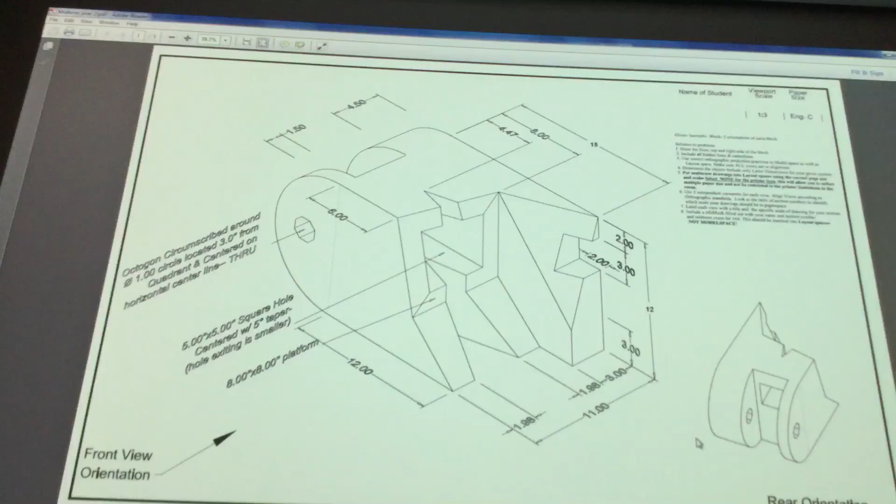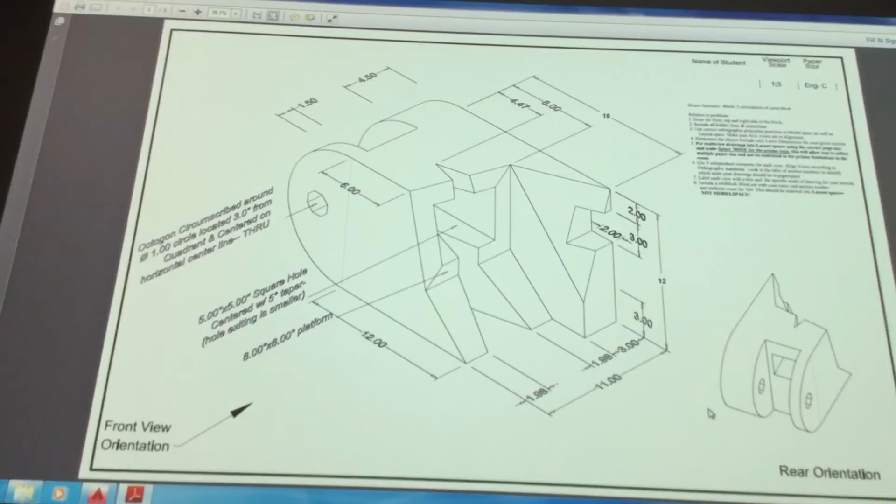This will be similar to what you end up getting in the process of making it now. So the only addition, you're going to have an auxiliary view to do. Okay? And this one doesn't have an auxiliary. If you want to test or try to do the auxiliary, this little incline here in the front, just cut through it. It's probably a good one to test your auxiliary skills.

Beyond that, it's just going to be a block where you create the front view, the top view, and the side view. Whether it be right side or left side depends on which direction you see the front view. Okay? For the most part.

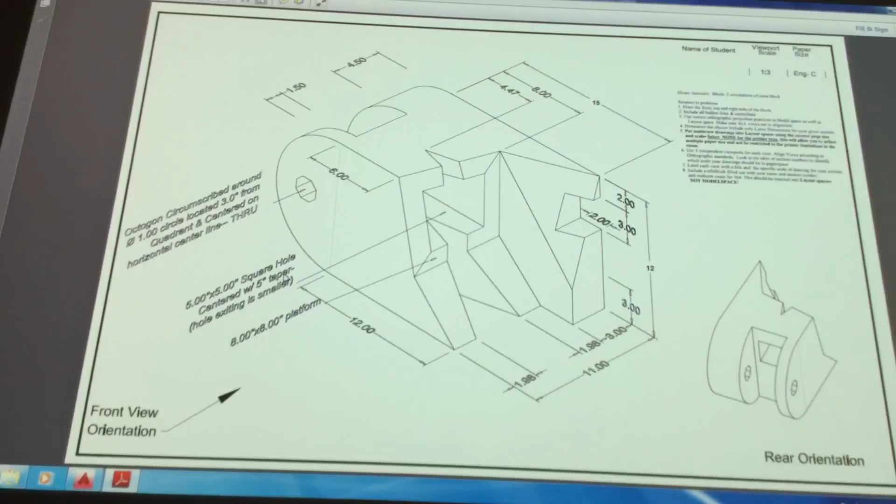This thing in the middle here, just make it a 5x5 square cut through the middle. Do not taper it. A taper is going down to a smaller hole. Okay? We don't want that. That will cause you all kinds of issues. Just make it a nice square hole through here and be done. Okay?

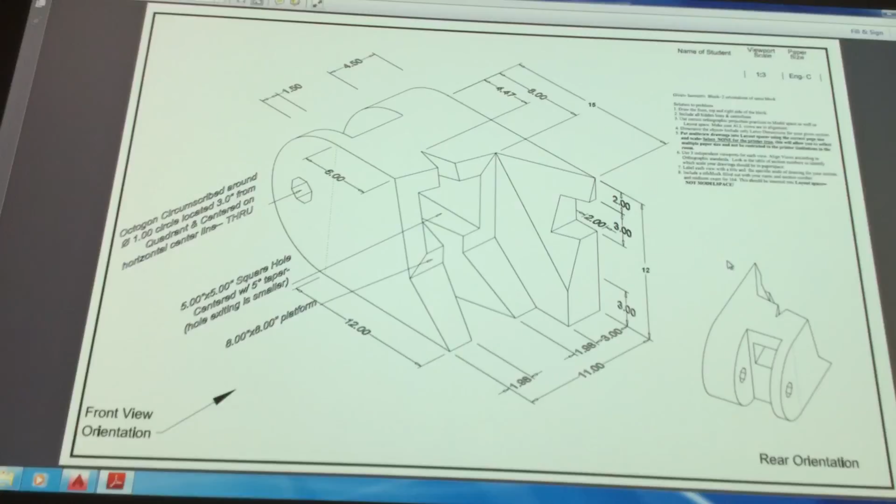To start off, you will end up getting some coordinates in your midterm that I expect you to follow. 0, 0 is going to be your starting point for the front view. Even if it's a rounded corner like this, you take a line straight down and a line across here, 0, 0 is going to be back here in the corner. Alright? If it was square. So start at 0, 0.

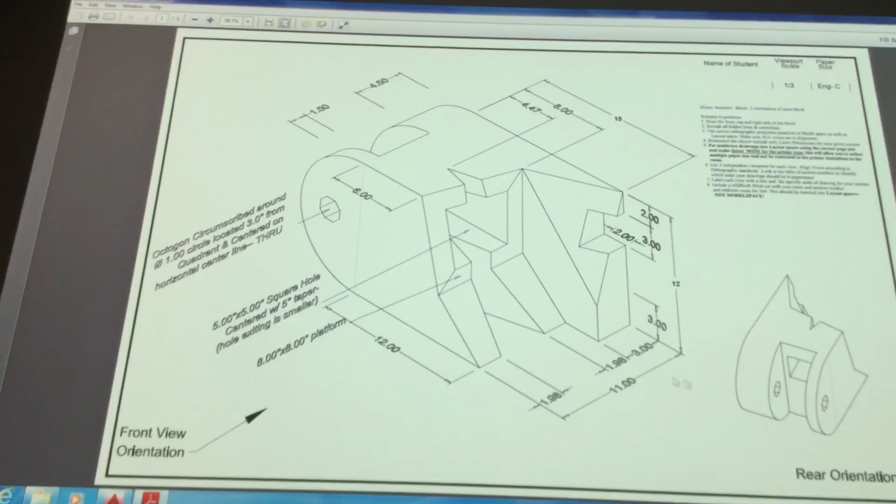I will give you coordinates for the lower left corner of the right side, and for the left front top corner. Put your front view, top view, and side view at those coordinates, and everything will be fine. Okay? I do this for a couple reasons. A, TAs get a DWG block they can superimpose over the top of it. Or, if need be, I don't think we'll have enough time to PDF it.

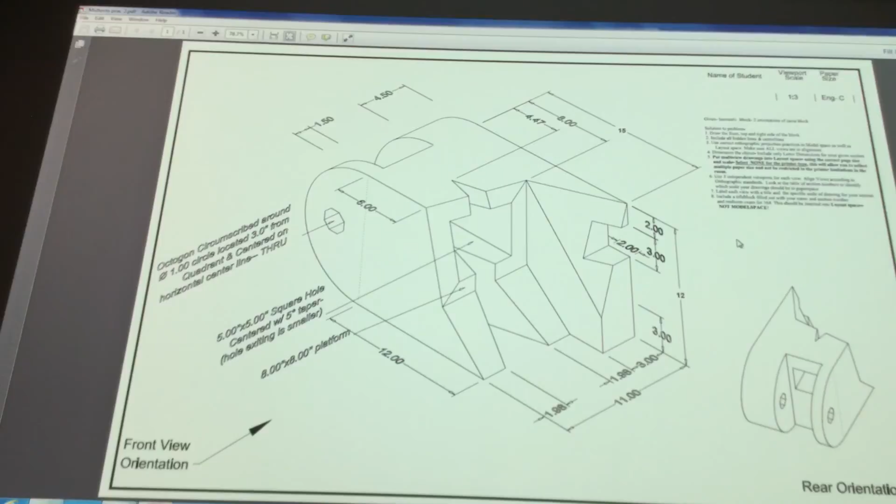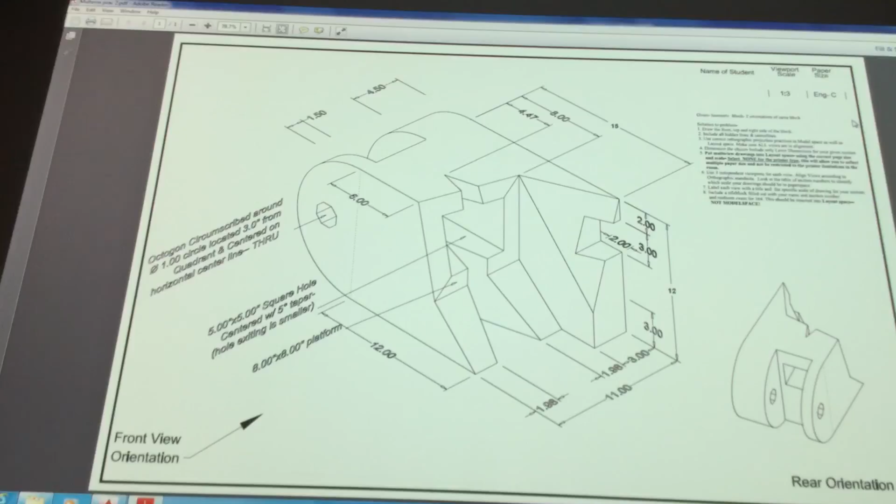It used to be in years past, I'd have you just send a PDF in. And Bluebeam, if you are practicing with it, will actually compare two PDFs, so you can see what's wrong and what's right. It was an experiment in trying to figure out if we could grade these things quicker, and it failed. It just ended up circling the whole thing, which doesn't mean anything. So now I give them a DWG block, and they can put it over the top of it and see where your lines are missing and where you have extra lines. Pretty straightforward.

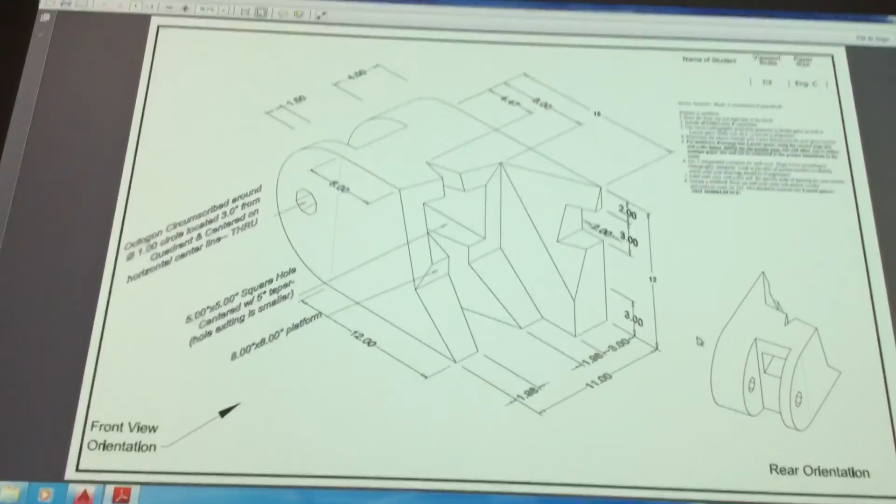So starting this thing, it's 21 inches long, 12 inches tall, and 11 inches deep. I would start there in all the views. I'm not going to get through most of this. The things I do want to hit are the engineering C and layout space. Make sure you have a good understanding of layout space, because most companies utilize it. AutoCAD is declining in use, but you should still have the ability to get into a file and manipulate it a little bit. One of the things is printing. That's done in layout space. So we're going to get through that.

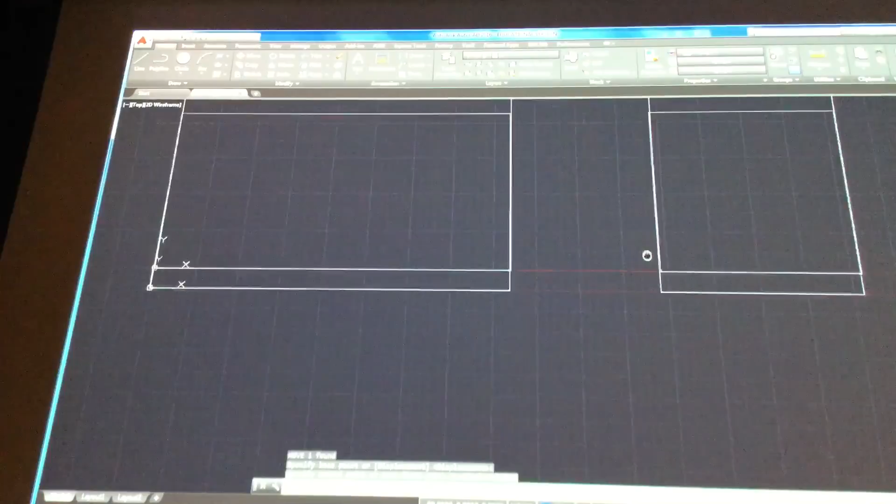So 21, 12, and 11. We'll do a box here. 21, 12. There's the front view. Here at 11, 12, there's the side view, and I'm just going to move it off to the side here real quick. And top view. I would suggest doing something similar, so you at least get going on this thing.

The largest problem I see when you first get this initial midterm is, well, how do I start? Well, there, you started. I used to not say a word during the midterm, and then I got to the point where, I was a horrible test taker when I was here, still am. I suck at it, okay? But it's that starting thing, getting yourself going.

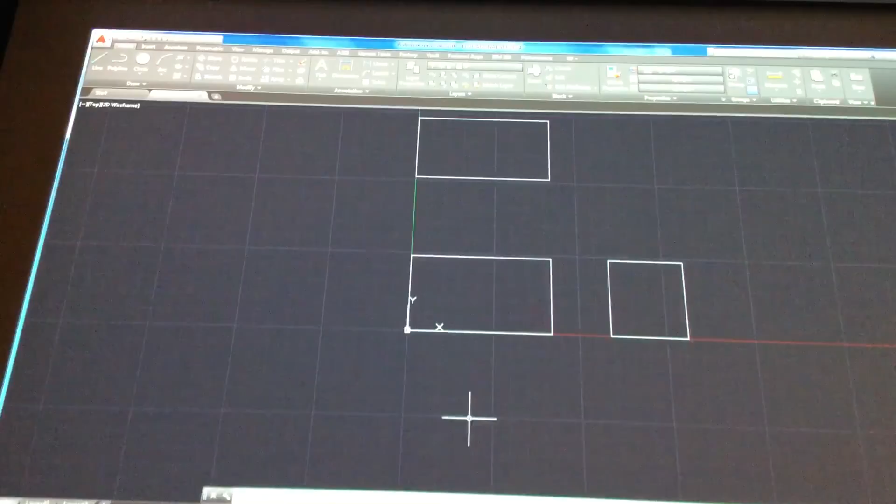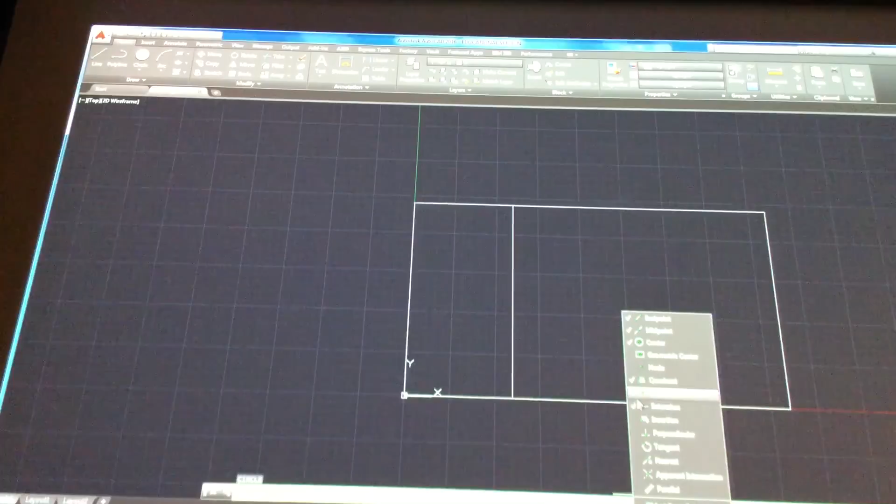This is just some block where you're trying to figure out how to see the front view, the top view and the side view, improving your visualization. It's just a start here. I know this whole end is round, right? I could explode all of these real quick and offset this thing 6 inches, and then draw a circle here. Let's see, midpoint, quadrant, and perpendicular snaps are good. So I can draw my circle in there and then trim some of this stuff out right off the bat. And at least we're started.

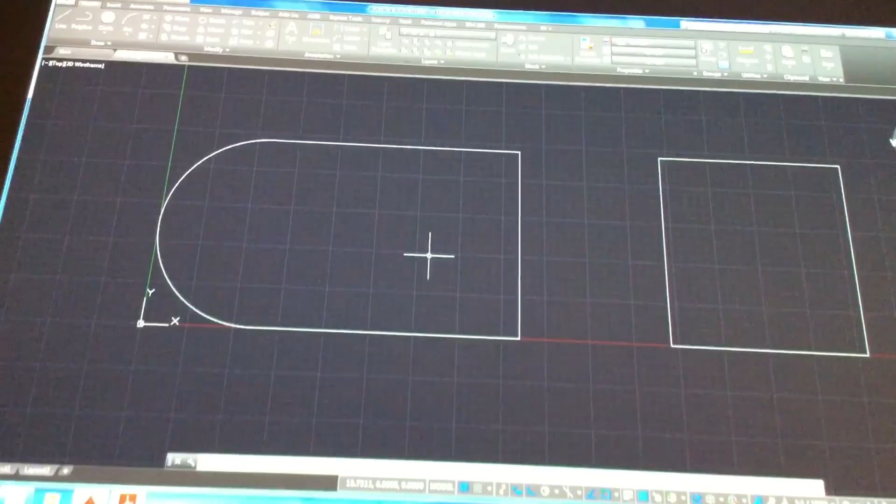Making it look like the object, okay? That's the big key, is getting things that you know will be correct. Even though I didn't look at it over here, I remember that it's circular on this end. And then we start working with things.

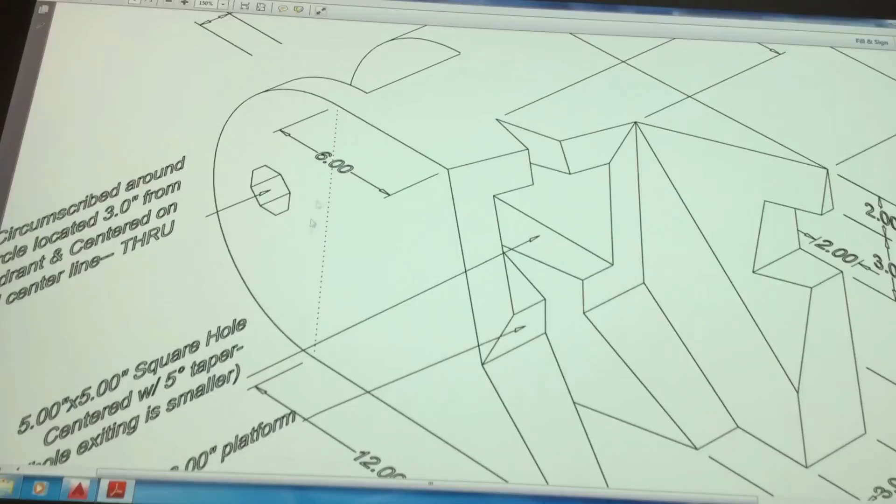We got 12 inches. Now, anytime you're looking at this, you'll notice there's some dotted lines here. The dotted lines represent either an edge or center of something. And if it's normally the center, I will put a center line in here. This one I forgot, basically, but this represents the center of that circle, at least that point.

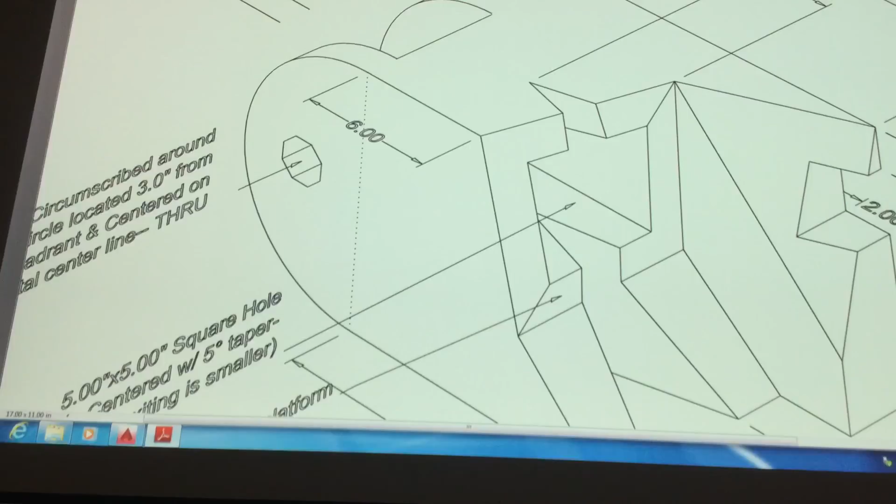You'll notice that this edge here goes to the center of that. The hole cut through there is at that point as well, all right? So we get some dimensions from this accordingly.

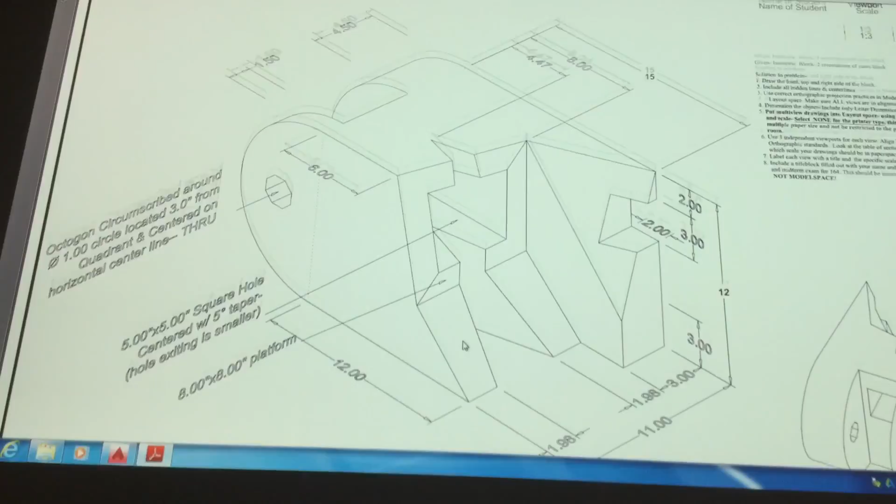Now, as we're looking at this, if you're going to do the front view, do the things that you can figure out. That's what I always tell everybody, okay? Well, we've gotten an 8 by 8 platform, so I know it's 8 inches by 8 inches, okay? At least that part is.

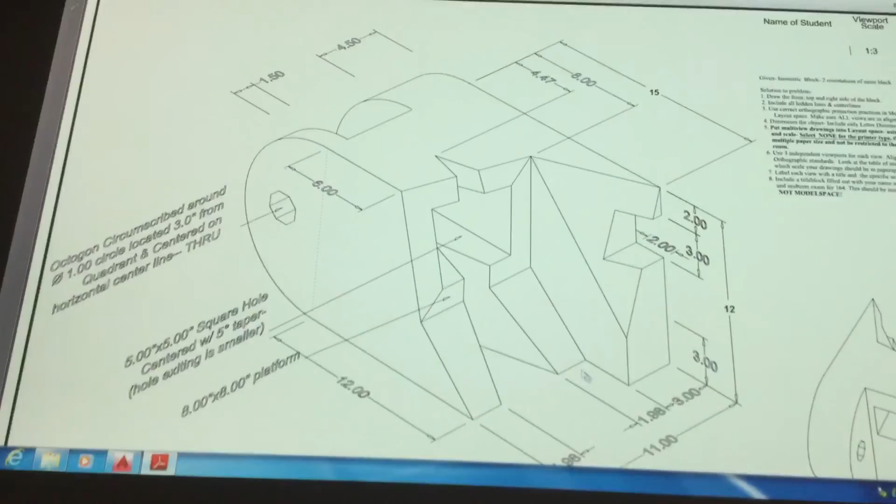So if I get over to this point, which is 8 inches away from the center back here, which happens to be along that line, it's sort of missing now, okay? I can just do a straight drop 8 inches and then go down to 12 inches here and get at least the start of the front view. And then you can work your way from that to get to other things. So I'm going to go 8 over, 8 down, and then 4 over to get to this point.

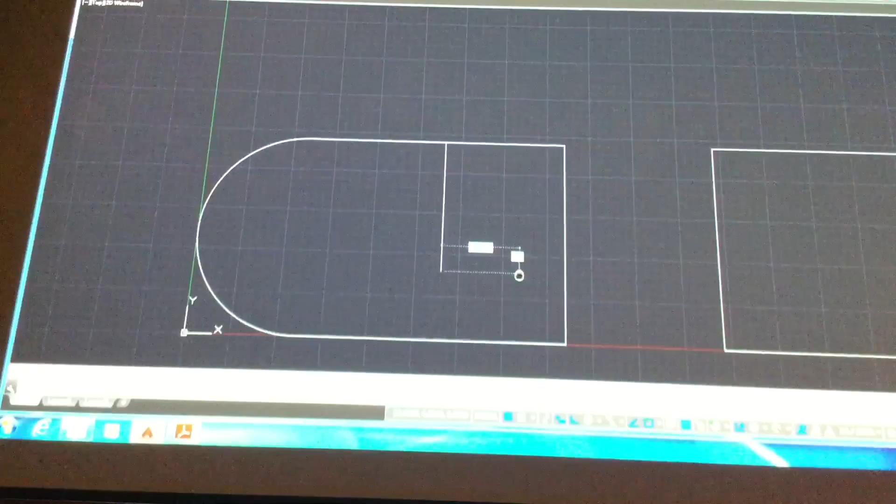Well, if you wanted to, there's the end point. If you really want to figure it out, just draw a line, 8 comma 0, 0 comma negative 8, drops you down, okay? Which gives me 4 and 4, right? At least the rest of the way should be 4. But it was 12 units over, so I could go at 4 comma negative 4. Yeah, that'll get me down to that point there.

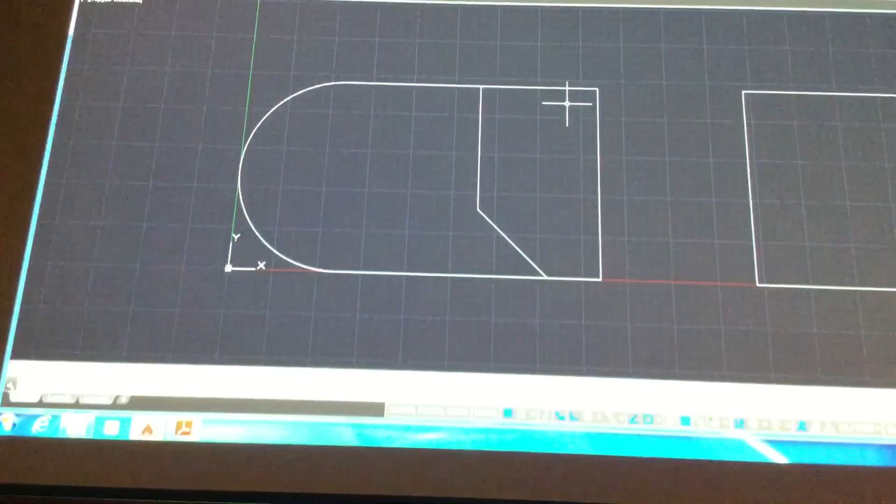All right? Get you the start of it anyway. So there's at least the start of the front view. Other things that we can figure out, well, this point starts here and then goes to 3 inches higher. Gives me the front part of that component there. This just comes straight across and over. All right, and then we can get this hole cut through here.

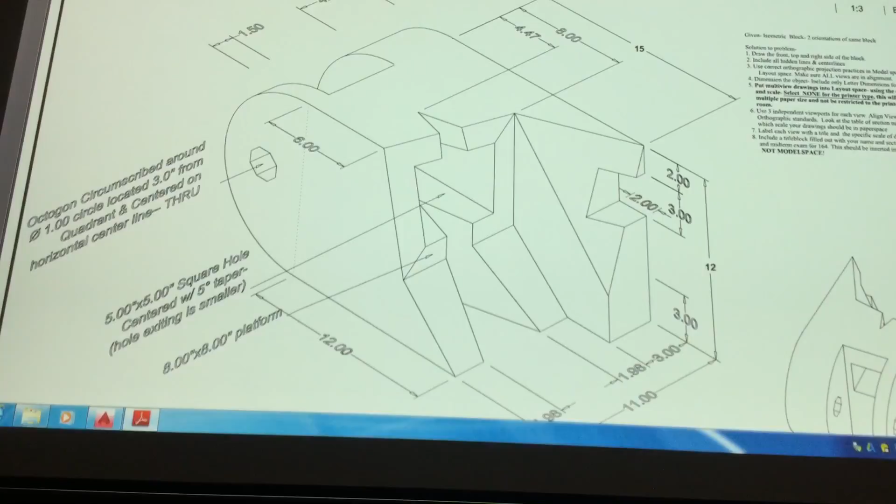It is a 2 by 3, looking straight at it, 2 inches down. So 2s and 3s, okay? Good. On one. Line up at 0 comma 3 and head to that point. Get the hole at 2 comma 3.

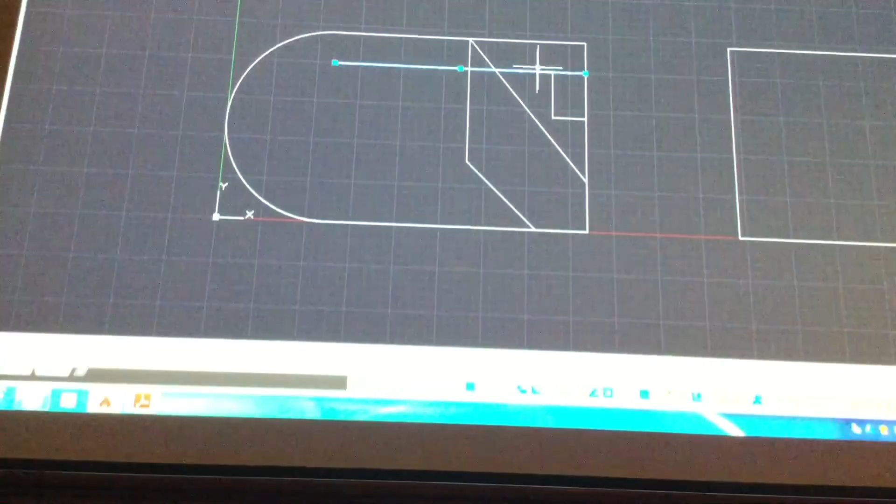There it is. You can offset this thing down to, was it 2? It was. And then take this and move it here to here. And trim out some of that stuff. So at least we have a lot going on with the front view that you can figure out really quickly.

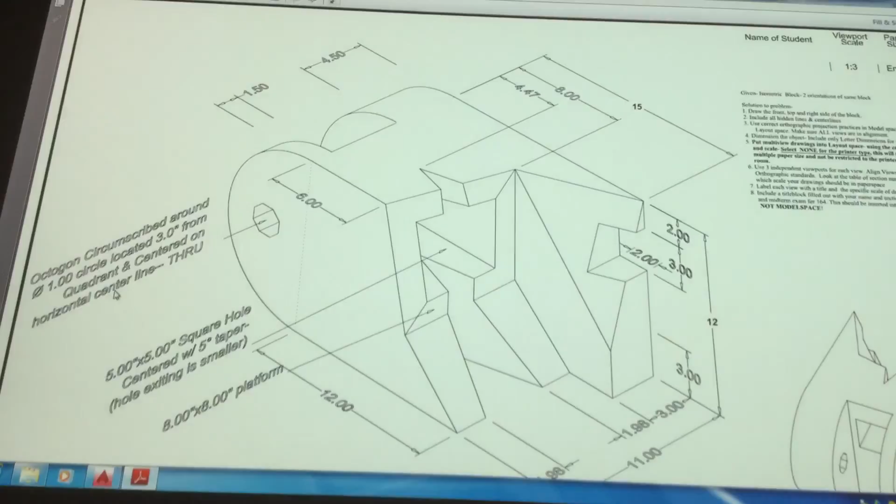Okay? Other things you can get, probably that octagon centered on horizontal center line. So if I take a line from the center out, in other words, basically it's 3 units in, use an octagon here. Okay?

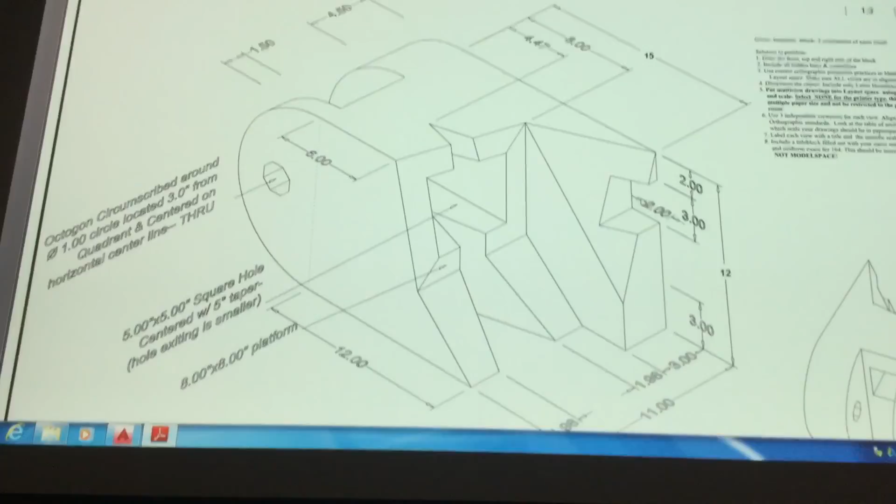Anything else in here that we can deal with? Not right offhand. I mean, we could, but it's a lot easier to draw it in the other view and project it back into your front view when you're all done. Okay? So we'll look at the octagon here real quick. And it was around, circumscribed.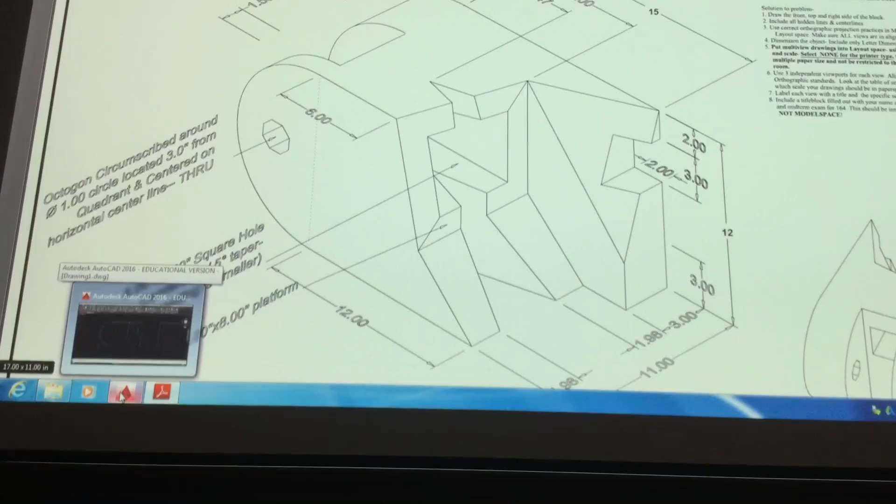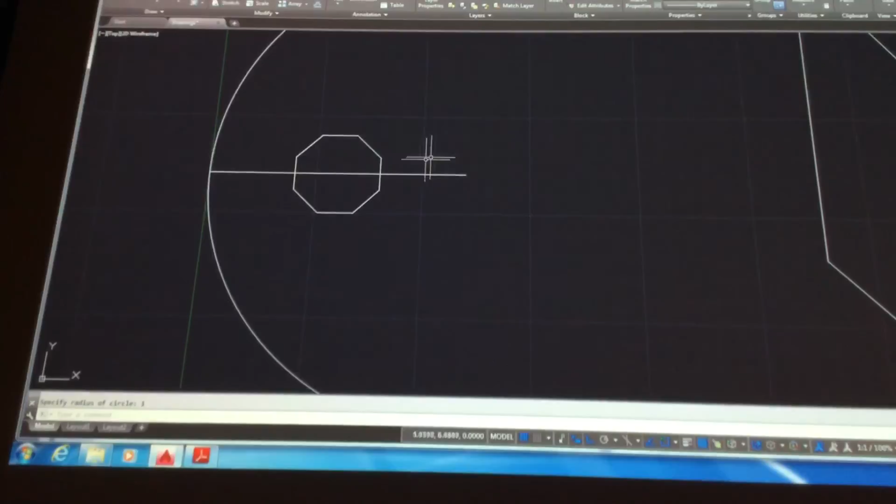Okay. So if we do a line here, center to here, and then there's my octagon. Come up, get the polygon tool, number of sides 8, midpoint here, circumscribed 1, there you go. Got it all done. Alright, so front view is pretty much done.

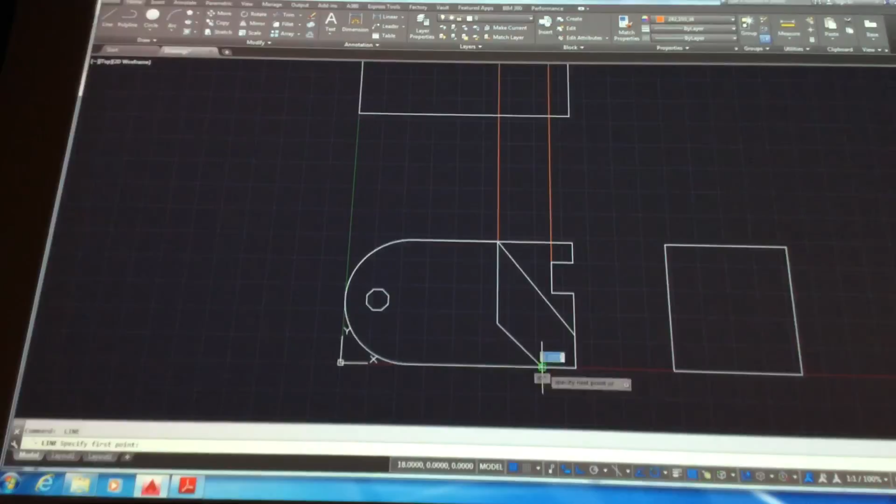Now, we can take a lot of this stuff up. If you want, do different lines, projections, okay? At least you'll know they are projections then, and not real object lines that you have to deal with. And then go back when you're done, all right? I like a lot of projection lines. I don't like to do many of them or all of them all at once because it causes it to get cluttered up there, all right? And trying to figure out what looks and goes where.

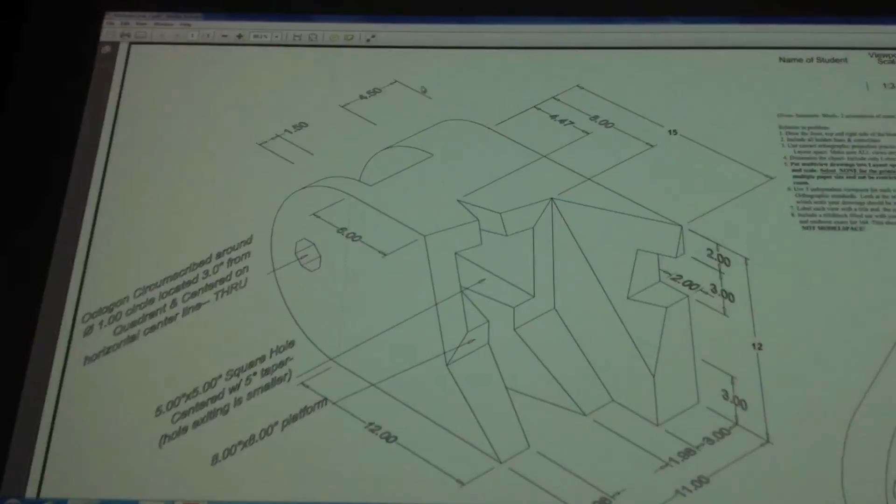Well, if I want to do this rounded in, I know that 4.5 and 1.5 in, I've got a slot here. So I can take that straight across there. So at 4.5 and 1.5.

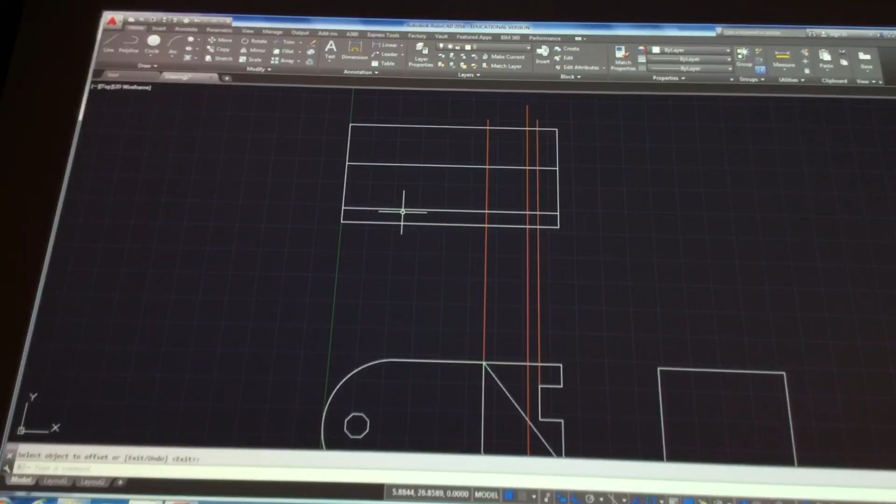And if you didn't know, if you hit enter once you're done with the command, it does that command over again. I mean, it could do it over and over and over again. Like the line tool, you have to hit enter when you're done, okay? But for the offset, when you are done, you hit enter, and you want to get back in to do a different...